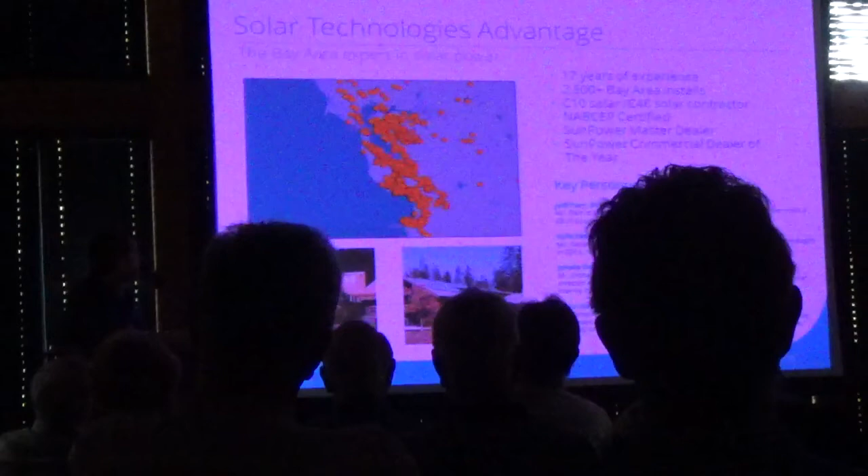We're both a residential and a commercial company, so we have a lot of commercial and residential systems all over the Bay Area. You can't really make them out here, but those dots represent all of our systems, so you can kind of see where a lot of our work is clustered.

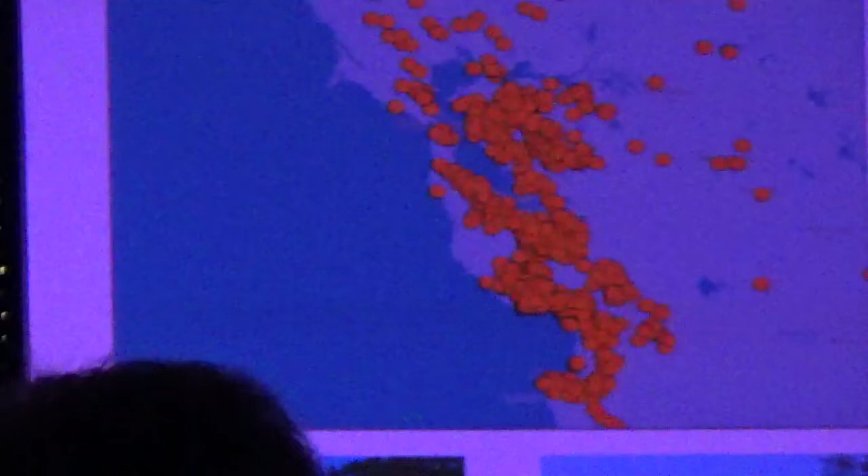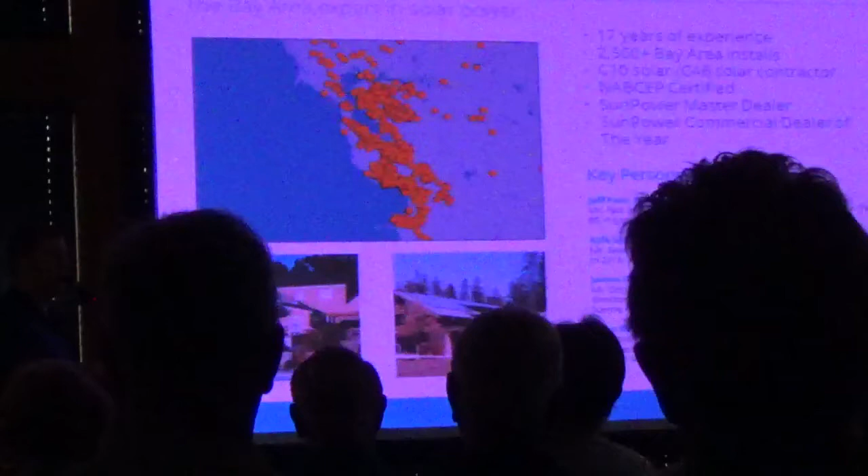I won't bore you with all these things, but any accreditation that you can earn in this business, whether you're NABCEP certified, all these different accreditations, we've achieved all those. And we're a C10 electrical contractor and a C46 solar contractor. So in essence, anything that needs to be done related to a solar project like this, we can do, even if it requires electrical upgrades and things like that on the main service panels and that type of stuff.

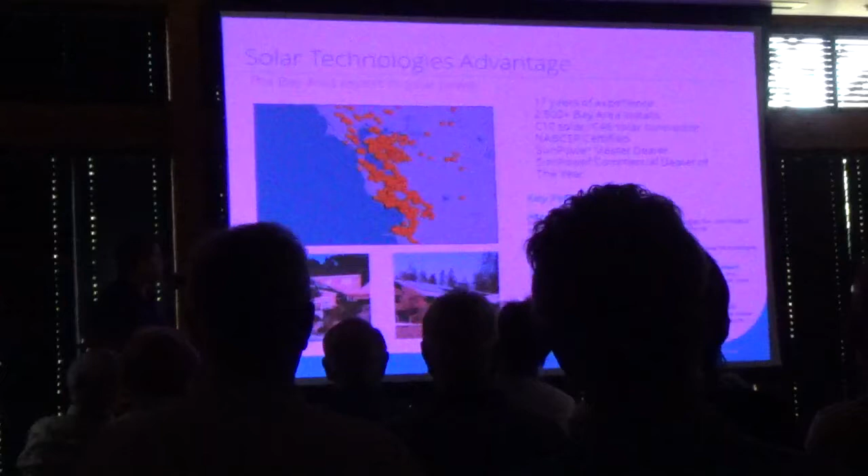The main people you're going to be working with are myself, I'm the president of the company. You're also going to have Kyle Severns, who was part of this process, some of the initial meetings. He runs our residential group. And then on the construction side, once we actually get started, you're going to have James Donaldson and Mike Ross, who are going to be the in-office and on-site directors of commercial activity, and they're going to be the ones running the installation work.

So let's get into how solar works. It's very simple, really, in its installation and operation. Sorry, I'm not too experienced working with the microphone here. It's pretty simple in its installation and operation.

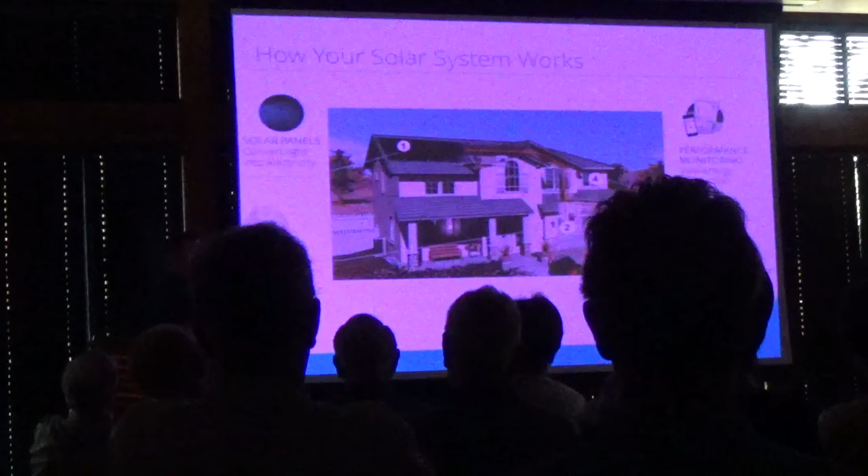You're going to have panels that go up on the roof. Those panels produce DC power, direct current. So what we need to do is invert that power to AC current that the homes can use. Your homes run on AC power, that's what PG&E pumps into your building. So the DC power from the solar panels, when the sun's shining, comes down to an inverter. The inverter inverts that power to AC power, or alternating current. That goes to your main service panel.

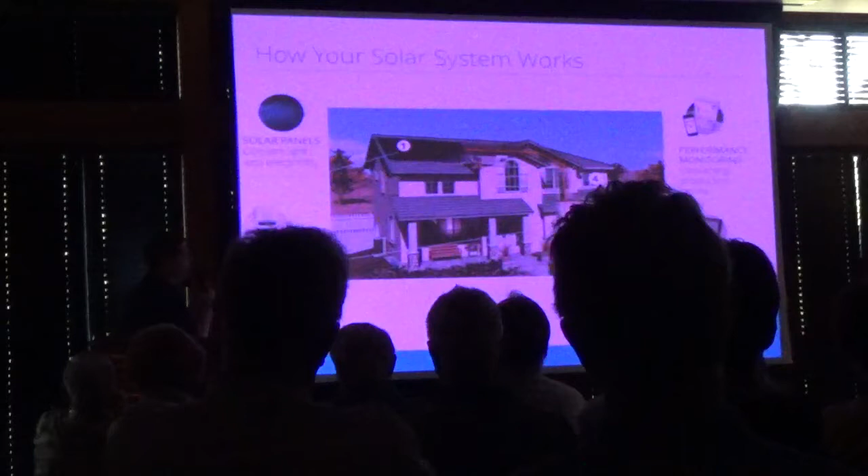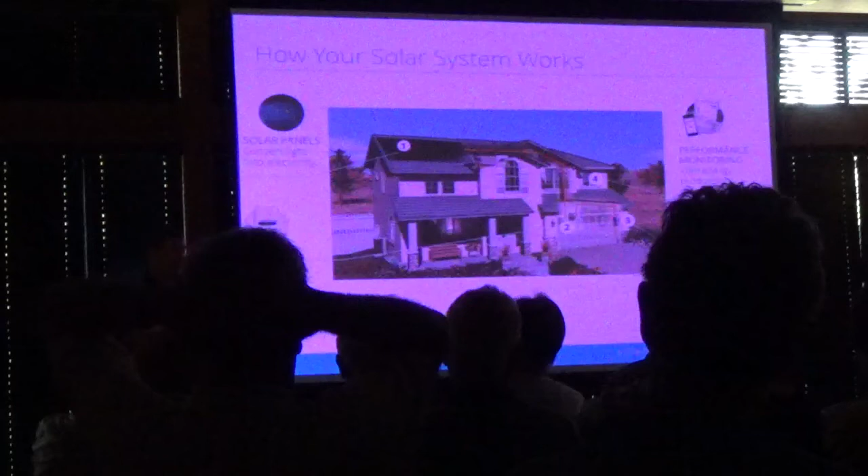During the day when your solar panels are generating electricity, it goes down through the inverter to your main service panel. When you're using electricity during the day, you'll be using that solar power first, so you won't be pulling any more power from PG&E. If you produce more solar than you're using, that extra power gets pushed back into PG&E's grid, and it rolls your meter backwards for credit. And if you have to use more than the solar system is generating, or use power at night, you pull power from PG&E just like you normally do.

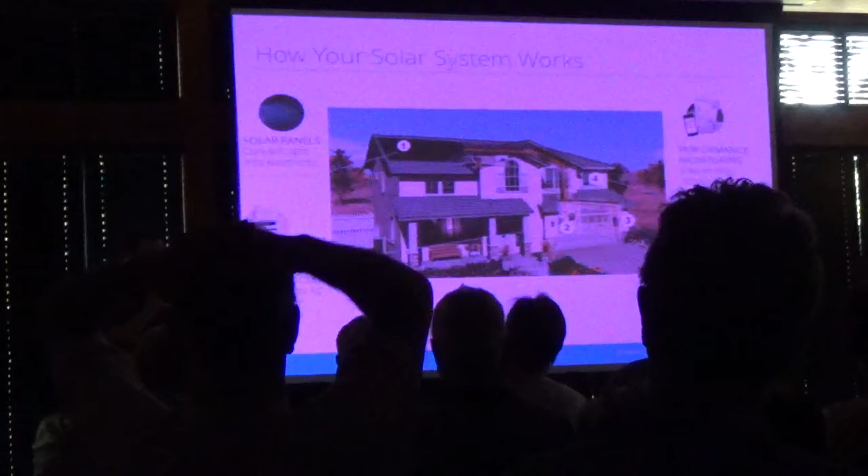So you don't need any batteries, you don't need any extra gear or anything like that. It's really gotten quite simple, where you just have solar panels connected to an inverter, and then it's connected to your main service panel, and that's pretty much it.

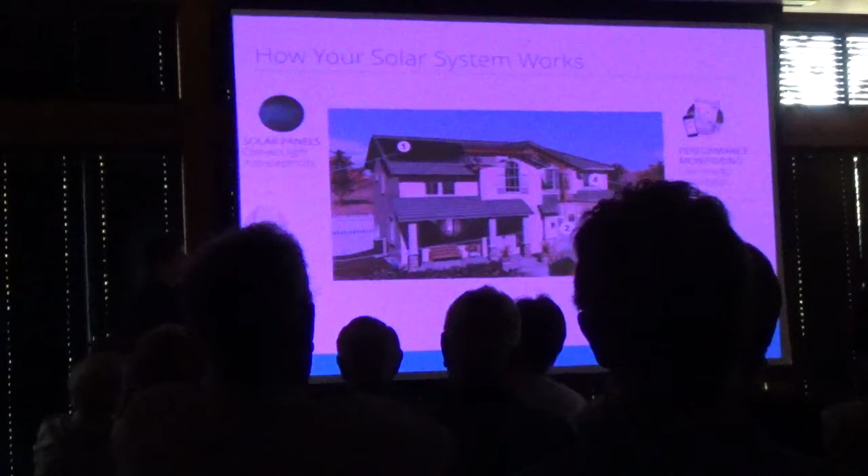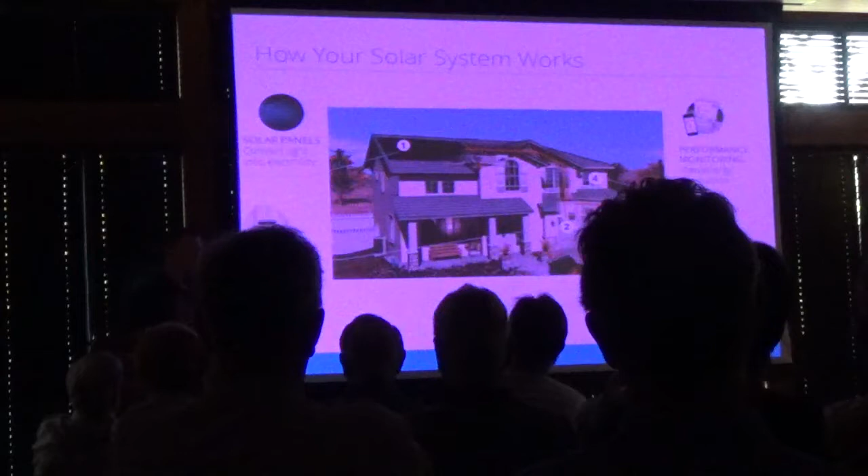Every system also gets an online monitoring system, so they come with apps. You can put it on your phone, your tablet, your computer, and track what the production of your system is in real time, which is kind of cool. A lot of people play with it to start, but really what ends up happening is you just want to make sure your system's running. So we monitor these things at our office as well.

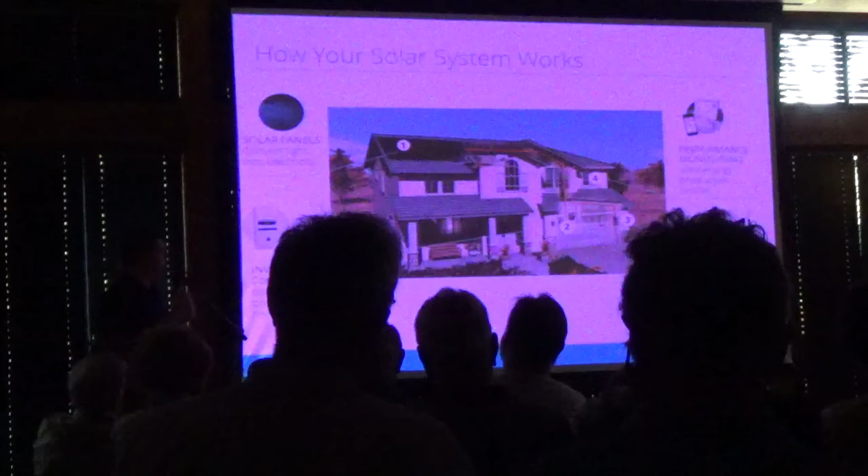But those are really the pieces that go into this. Really it comes down to, are you producing more than you're using? And if so, it gets pushed back into the grid and you get a credit, and that credit pays for your usage at night.

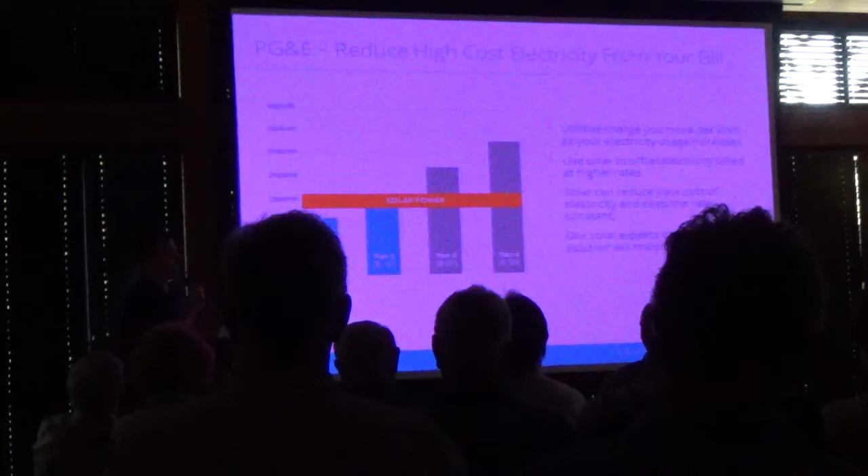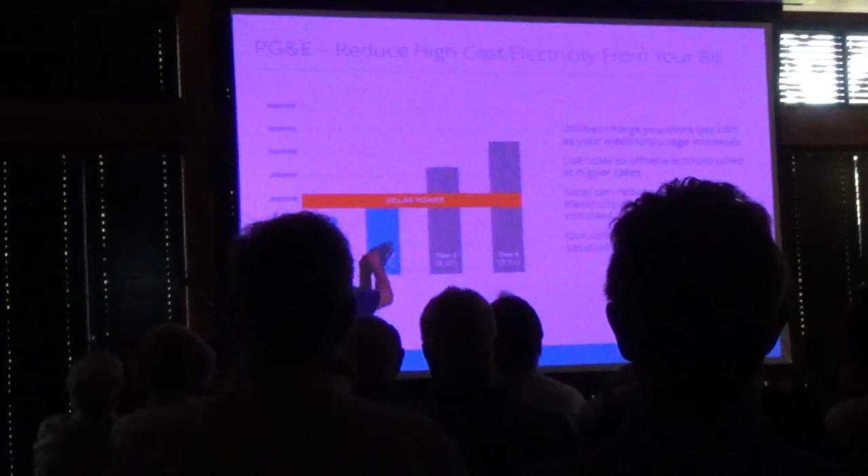So that's how solar works, we just walked through how it goes on the roof. So why do people go solar? The simplest way to sum this up is basically solar is less expensive than what PG&E is charging you for electricity. If you're not familiar with how PG&E charges you, they have a tiered system where as you start to use electricity during the month, you start at 0, and they count the number of kilowatt hours, or units of electricity, that you're using. As you use more, they start charging you more and more for that electricity, so it gets quite expensive.

This doesn't do a great job of depicting it, but if you pay cash for a solar system, the cost is kind of down here. If you finance your system, it's kind of up there. But you can see with the gray bars there at the end, regardless of what you do, solar is less expensive than what PG&E is charging you, which is why everybody's going solar.

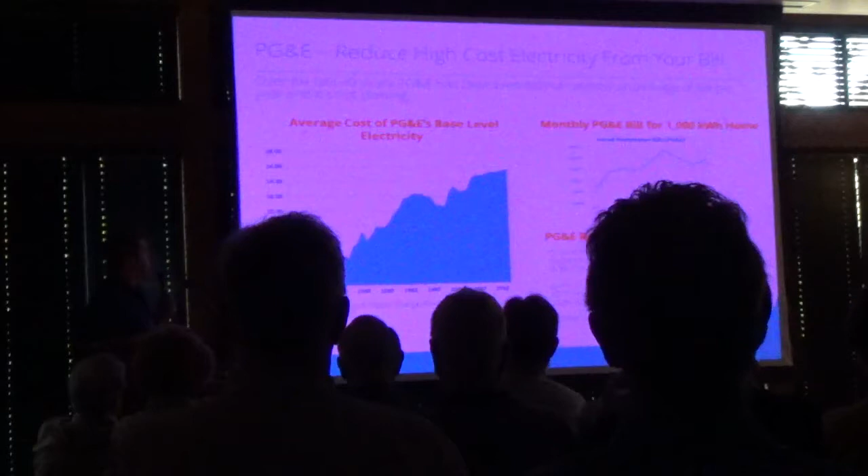It also protects you from rising rates. Once you go solar, you're really no longer dependent on PG&E. One thing that everyone's probably familiar with, given that we're all PG&E customers, is that they've consistently raised rates year after year after year.

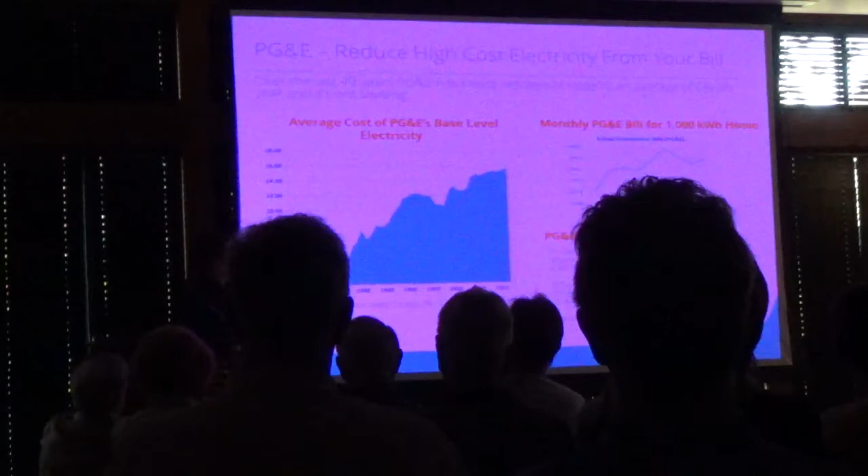This is the bottom two tiers, going back to 1967. This comes from PG&E, so you can see those rate hikes are pretty consistent, up and to the right. Here's a customer who had a $250 a month bill in 2005 - that's basically where they're ending up now. And you can't really make this out, but this is their recent rate case where they got approved a 17, 5, and 6% increase for 2014, 15, and 16.

So one of the benefits immediately is that the electricity is less expensive, so you save money right off the bat. The second benefit is because you no longer have to buy electricity from PG&E, you no longer have to worry about your bills increasing.

I'll get to this if there's going to be a question - the committee asked me to prepare this, but this is basically what is happening to PG&E rates moving forward. If someone has a specific question, I'll turn back to this.

We can also take advantage of what we call time of use rates. The way PG&E works, if you go on a time of use rate schedule, they have these different blocks. At nighttime, they charge you very little for electricity. In the early morning and evening, they charge a little bit more. In the peak part of the day, they charge you a lot.

So if you want to go solar, what we're going to be doing is meeting with you one-on-one. We're going to look at your electrical usage history, and we're going to determine whether putting you on a time of use rate will let us take advantage of this expensive power.

Essentially what we'd do is design a system so that it's overproducing electricity and pushing it back during this part of the day. You earn a lot more financial credit from that, so you can actually save a lot more money that way. That's one of the things we'll be doing with you on an individual basis.

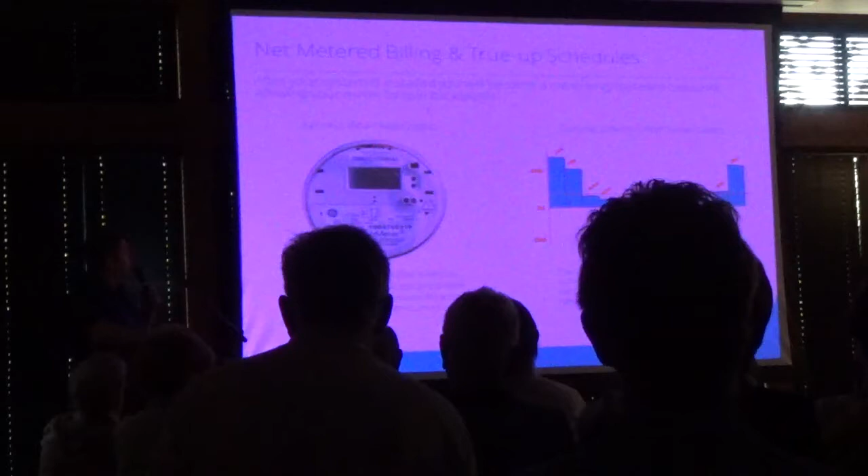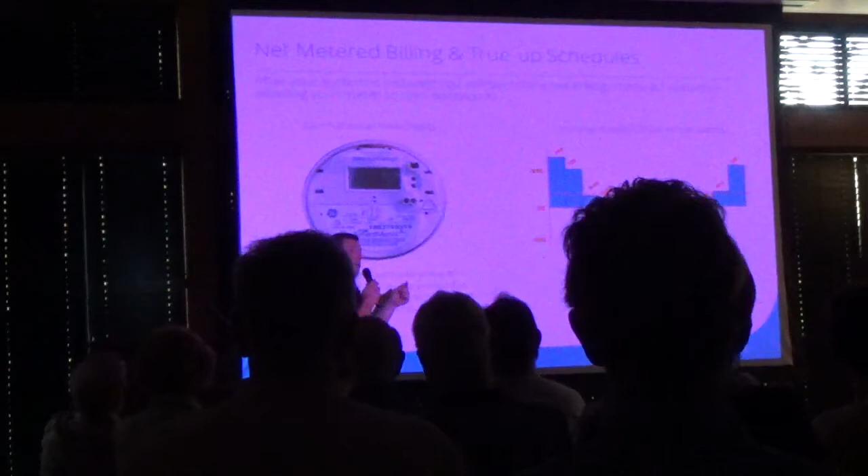Then lastly, once your system's installed and you become a solar customer, one of the nice things is you go on what's called a 12-month true-up schedule. From the day you go solar, you get a bi-directional meter, which counts how much you're using and how much you're producing. Then you go on a 12-month true-up schedule.

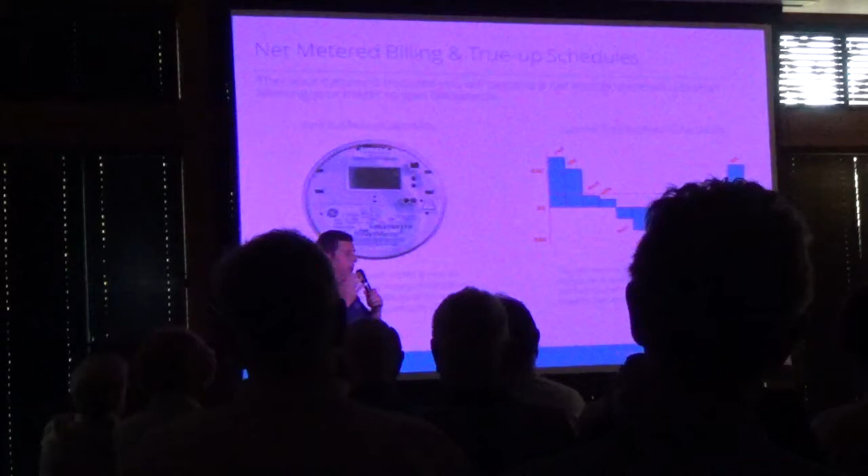So you're only going to have to pay your electric bill once a year. What PG&E does is every month they send you a true-up schedule and say, okay, for the month of January, the sun's not in the sky as long, so you're not producing as much solar - you're probably paying PG&E a little bit during that month. They say you owe us a little bit during this month, and they tally it up month after month.

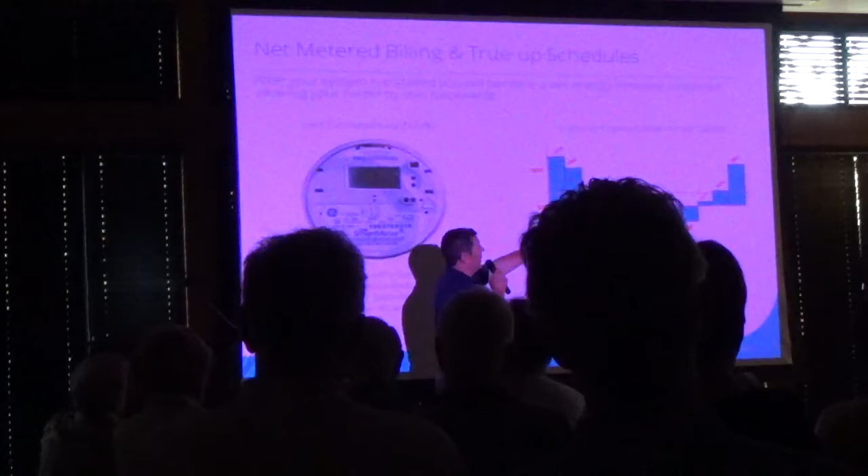In the summer months, you're actually going to produce a pretty significant credit during those months, which will offset the winter months. Then at the end of the year, they just say, okay, as a total for the 12 months, you owe us this much money.

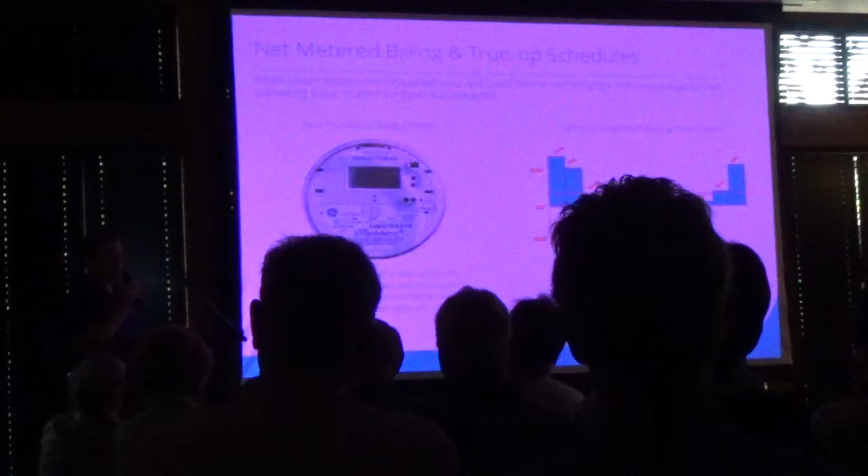In the example we've prepared, that offset eliminates about 90% of the bill for the unit, so you can get an idea of what that would be at the end of those 12 months. But the nice part is you only have to pay once a year.

So the benefits of going solar - as we mentioned, the primary benefit, the reason most people are doing it nowadays, is to save money. We used to have a lot of people go solar strictly for environmental reasons. Now people save so much money with these things, it's really driven by dollars. But this kind of gives you an idea of what we're trying to do.

If this is your pre-solar bill, this is what you're paying PG&E before you go solar. We're trying to eliminate the majority of that and leave you with about 10% of the bill remaining for PG&E. There's really two ways you guys can go about doing that.

One is you can pay cash for the system, so you have an upfront payment, but basically all of this is eliminated. Or the other option is we can look at doing a loan - we can look at financing these systems. And so you don't pay anything out of pocket; you finance the whole system with a solar loan.

What ends up happening is your remaining PG&E bill plus your solar finance payment ends up being less than what you were paying PG&E before you went solar. So there's nothing out of pocket, and on day one you save money, you start saving money. So when we meet with you individually, we'll go through those scenarios with you.

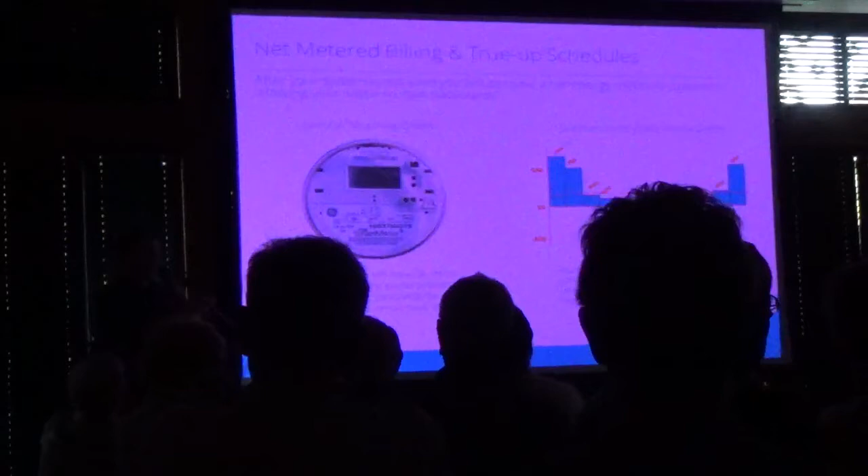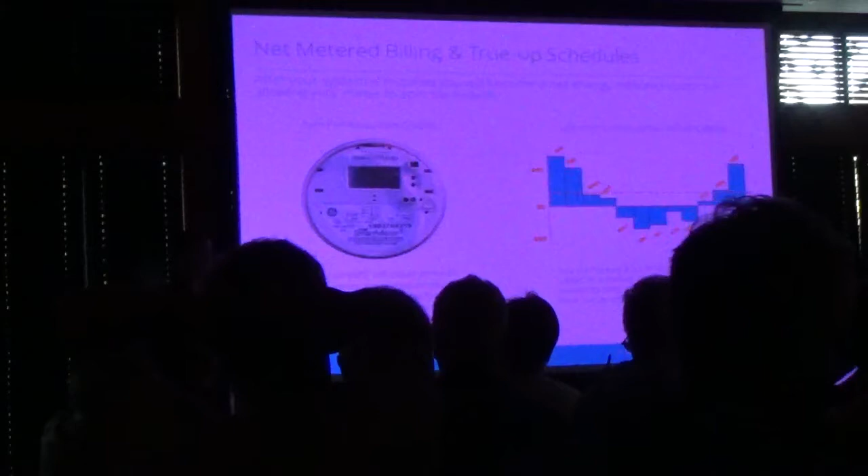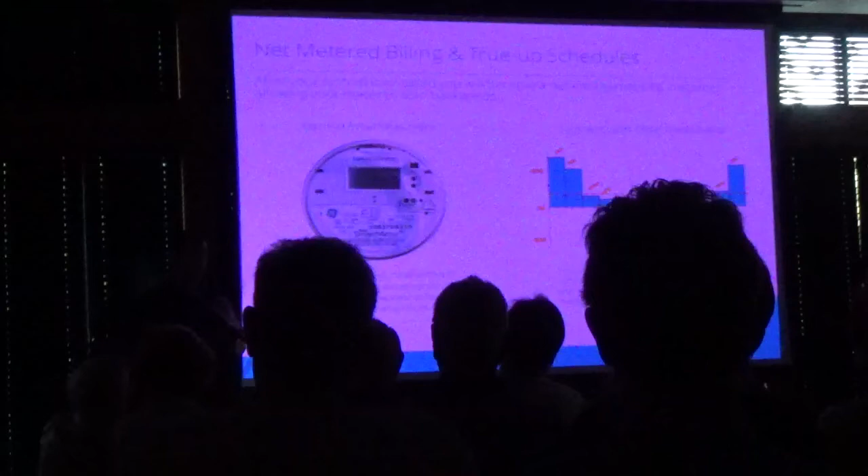Is that annual payment fixed? In other words, if a person preferred to have monthly payments, is that possible, as opposed to a lump sum at some point in the year? Are you referring to the true-up schedule? Yeah. You can, so you have the option of paying monthly if you want. You don't have to. You'll get a bill every month, and you can pay during those months and not pay when it shows a credit. At the end of the 12 months, they're going to net out those 12 months of debits and credits from your solar system, plus what you paid them. So if you want to pay on a monthly basis, you can for sure.

For some people who want to pay cash, those are the people who want to get a return on their investment. You recover your investment really fast, and you have a free electricity bill after that. That's one way to do it, and it's really popular. The other way is a loan. You pay nothing out of pocket, and we can walk you through different loan options in person. The details are better done in person.

The other benefit is you get a 30% tax credit, which everybody loves. So 30% of the gross cost of your system is going to be coming back to you in the year that the system is installed as a 30% tax credit. So not a deduction, it's a dollar for dollar tax credit. If anyone's on AMT, it applies to AMT as well.

Is that just for 2015, 2016? As it stands now, it's through the end of 2016 tax year. Commercial will revert to 10% after the 2016 tax year, but the residential tax credit goes away completely as it stands now at the end of 2016. You would technically have to qualify for the tax credit, meaning you have to have your system placed in service, which is the verbiage the tax code uses, basically meaning your inverter and your panels need to be in place. It doesn't need to be connected to PG&E's grid or operational, but it needs to be placed in service, basically bolted down.

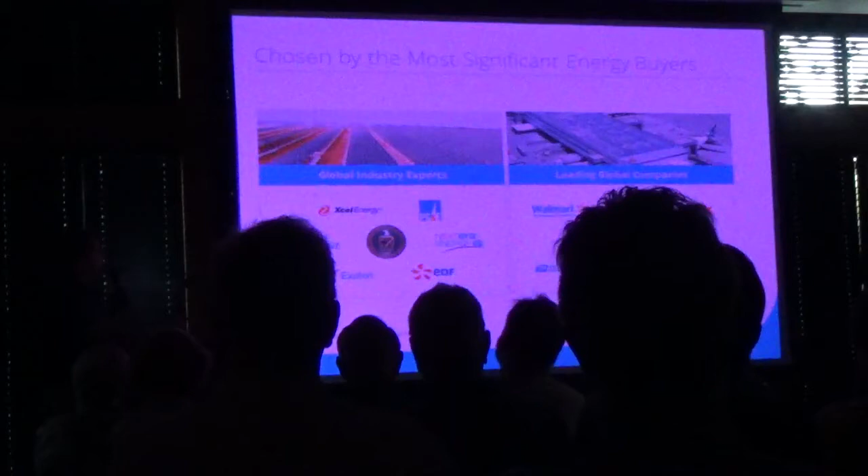Here's an example of some of the customers. They really are kind of a leader in commercial, residential, and utility. They cover all aspects of development.

What makes SunPower such a superior product really goes to the architecture of their panel. I don't want to bore everyone in the room with too much of this stuff, because some people aren't going to be interested in it. But this is a SunPower cell, and these solar cells are made out of silicon.

When the sunlight hits them, it generates electrons that create electricity. The silicon itself is better than their competitors, but the entire back of the cell, if you flip it over, is covered in copper. So you can literally fold this thing like a piece of paper and unfold it, and it still produces almost at max capacity. Everyone else's cells are a thin piece of silicon, with silver paste dripped on the front and two conductors. This thing, if you bend it a few degrees, it shatters like an untempered piece of glass.

Over the years, as the wind hits the modules and they bend, this really drives the majority of the reliability that goes into the architecture of the cells and the panel. The numbers are just staggering when you compare the reliability of the SunPower product to its competitors. We've installed tens of thousands of SunPower panels over 7 years, and we've never replaced a SunPower panel once it's been placed in service. Some have been damaged in shipping, but none have been pulled out of production and replaced.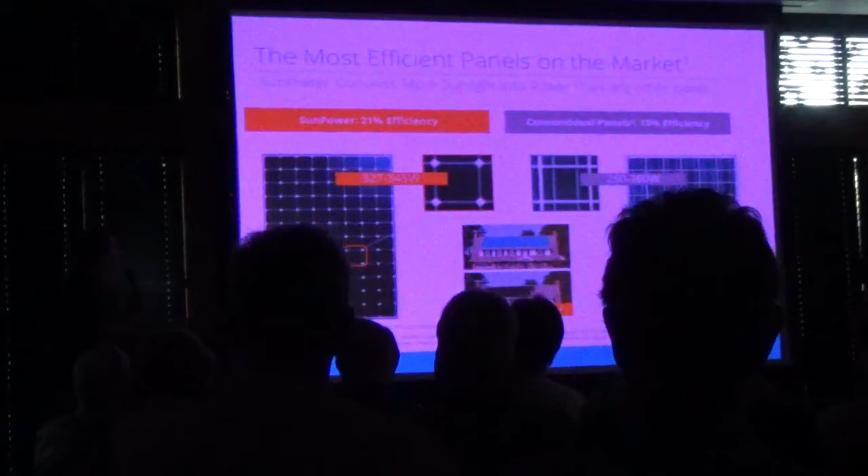The other nice thing about these panels is they're more efficient, so they produce the same amount of power in a much smaller footprint. When you look at your roofs, because you're a vertical building with multiple floors, you have a limited amount of roof space for multiple manors. So we have to figure out how to get the maximum amount of energy out of that roof so we can offset the majority of the bills for all the manors under that common area roof.

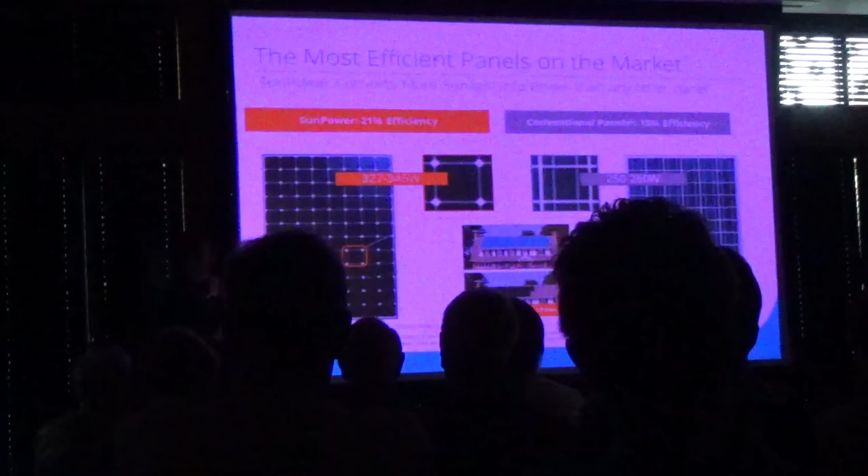SunPower panels are about 21% efficient. You can see everyone else's panels are about 15% efficient. You can tell the difference in the color of these different modules. This one has a much darker look because it has a better anti-reflective coating on the glass, so more light goes through the glass and surface of the cell and is absorbed as energy. Everybody else's panels use cheaper anti-reflective coating, which reflects more light back at you, giving a bright blue hue. The camera is making this look brighter than it actually is, but you get a brighter blue look as opposed to a darker black look with SunPower.

But you can see the difference. This is the same size system, the same productivity system, but you can see how much less square footage the SunPower panels take up to generate the same amount of power. And that's another reason they went with it.

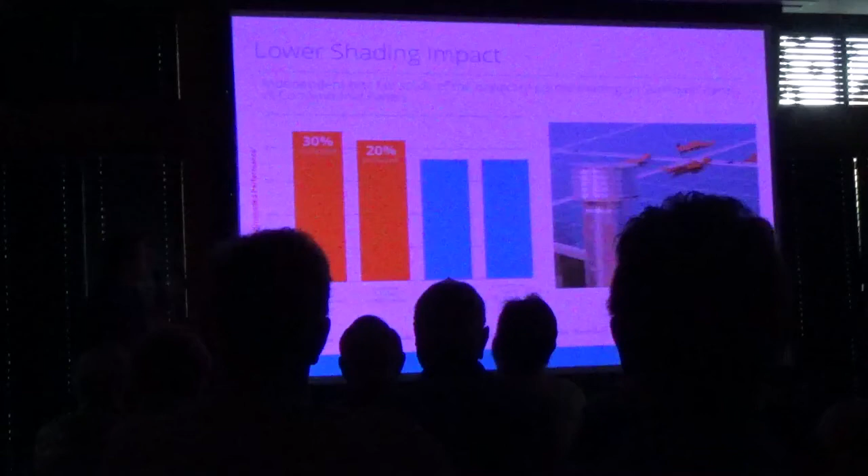And this kind of gets back to the same thing that I was talking about previously.

One of the other best parts about SunPower is they have the best warranty in the business. They have a 25-year warranty, and they guarantee 95% production through the 5th year, then linearly degrade the panel to 87% production by the 25th year. So at the 25th year of operation, they guarantee it's going to generate 87% of its original rated power. If a SunPower panel does end up failing, they pay to remove the panels off the roof, ship it back to SunPower for testing, either fix it and send it back to you or ship you a new product, and they pay to have it put back on the roof. Nobody else in the industry does that. So you get more performance guaranteed, and essentially no cost coverage on the panels if there's ever a problem for 25 years.

What's the warranty on the inverter? Typically 10 years. You can buy extensions to those, but the standard is 10 years.

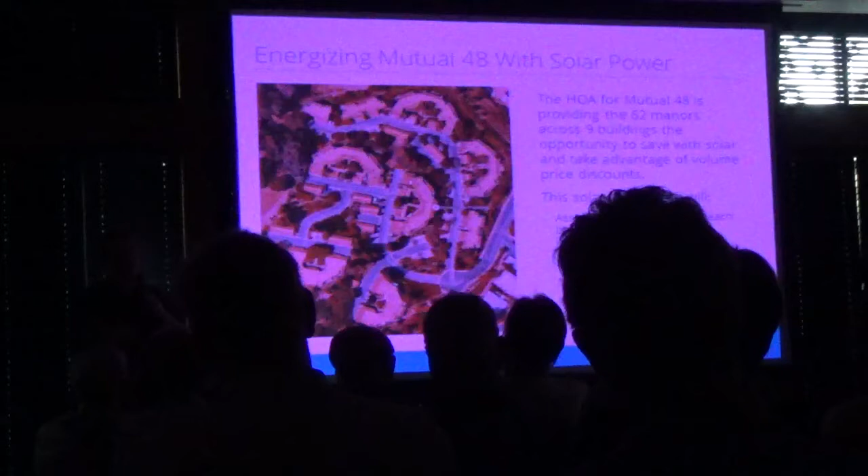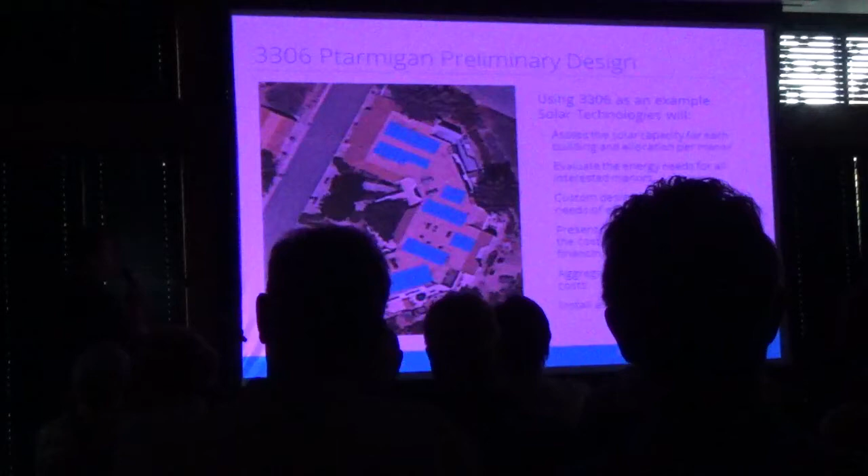So looking at 3306, this is actually a to-scale rendering of what a system might look like. We have a lot of constraints to work with from the building and fire departments. We have to have certain setbacks, and we can't cover skylights or some vents and things like that. So we're going to have to figure out the most efficient way to install modules on these roofs.

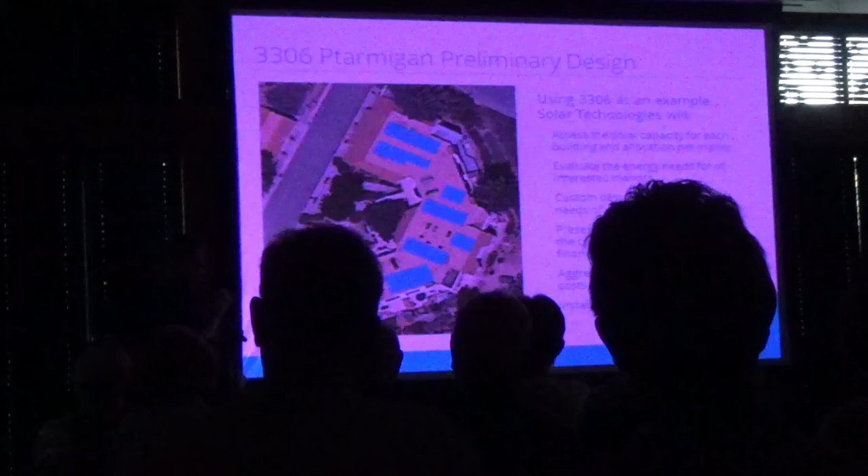For people who want to go solar now, we want to take up as little space as possible so that the majority of the roof is left for others who want to go solar in the future. We're going to go through each building and meet with all the manor owners individually, working through this with all of you.

I'm jumping ahead on slides here, but since we're looking at this, you'll see there's an advantage to going solar now as a group versus individually. The easiest way to describe it is that getting solar panels up and mounted to the roof is pretty consistent, whether it's 2 units, 4 units, or 6 units—that takes about the same amount of time.

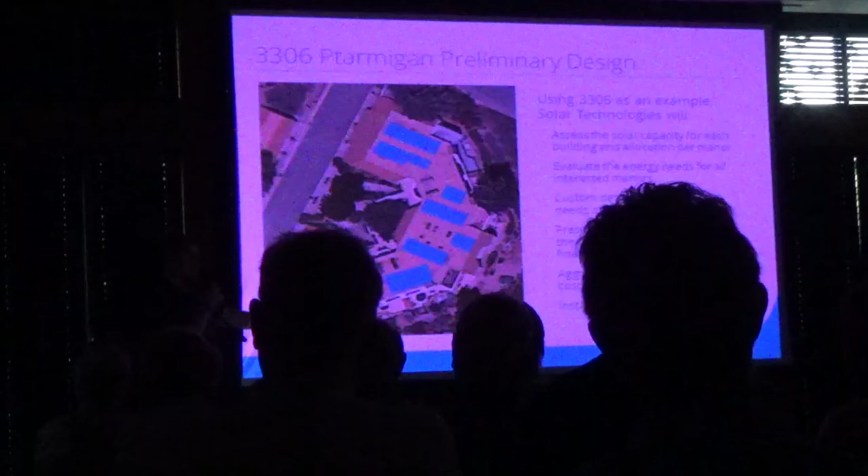What's different is when we come down off the roof and connect to the main service panel. There's a decent amount of work and cost in connecting all the solar panels to the inverters, to your main service panel, and interconnecting them to PG&E. As more people go solar, those costs are spread across everyone in that building, so you get economies of scale shared across the group, as opposed to one unit doing all that work just for one system.

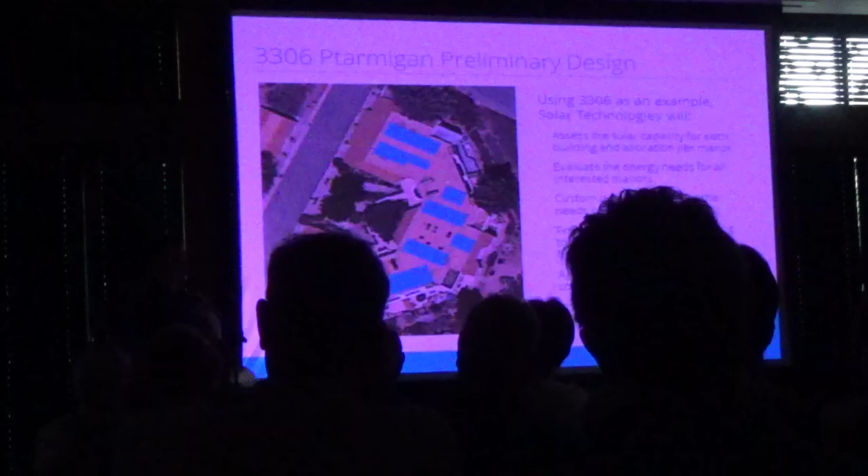Can you put panels on the carports that have no units around them? You can. One of the challenges is how you need to pull wires from those solar panels back to PG&E's main service panel. So if we use 3306 as an example, if there weren't trees or shade and we put solar panels on this side, we'd still have to trench all the way back to the main service panel.

So what we're trying to do is use the cheaper, more cost-effective installation methods first.

There's power to those carports, you know that? Garages, yeah. Well, not garages—I'm talking carports. So we can look at those. I don't want to dive too deep. Maybe there's conduit you could pull back. There might be, I mean, we can look at all that stuff. All we've looked at is 3306 without going down a rabbit hole.

It'll influence how we interconnect your system with PG&E and a bunch of different things. We'll assess all of that when we do the on-site evaluation. But right now, the cheapest way to install solar is on these roofs, coming straight down the side of the building and connecting directly to the main service panel.

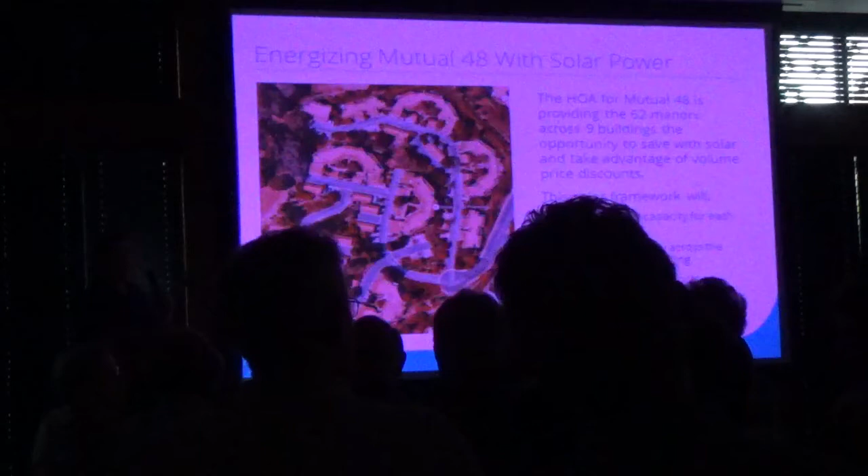So on 3306, which is an 8-unit building, have you determined there's enough space for all 8 to go solar? Yeah. And have you looked at any of the 12-unit buildings? Generally speaking, yes, not specifically.

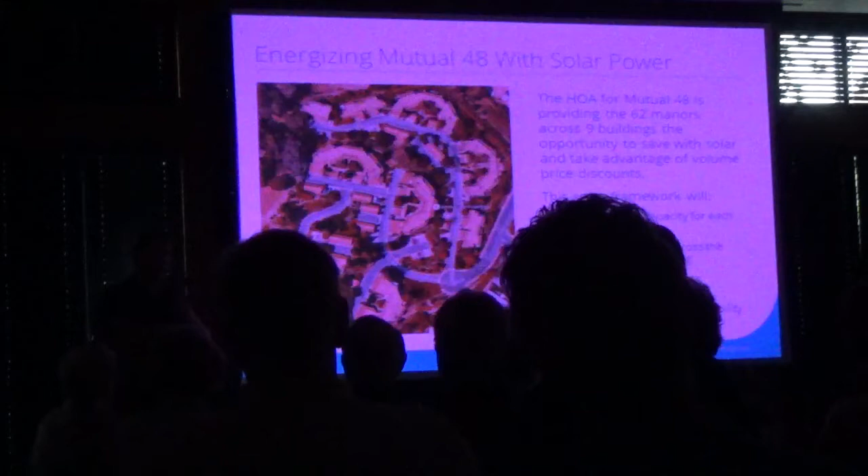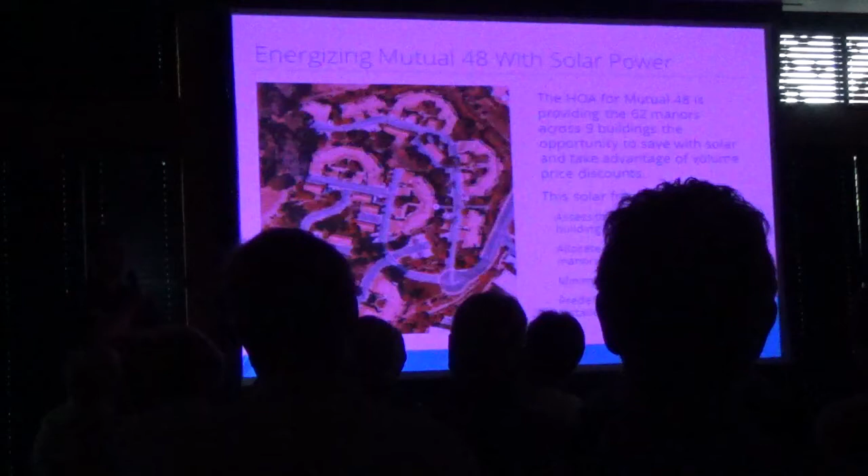For 3306, would there be enough power if every one of the 8 owners wanted an electric car? No, it'll be at capacity at that point. An electric vehicle, if you're using the full battery capacity, is similar to adding another manor—they use about that much electricity. So you're essentially talking about taking this from an 8-manor building to a 16-manor building.

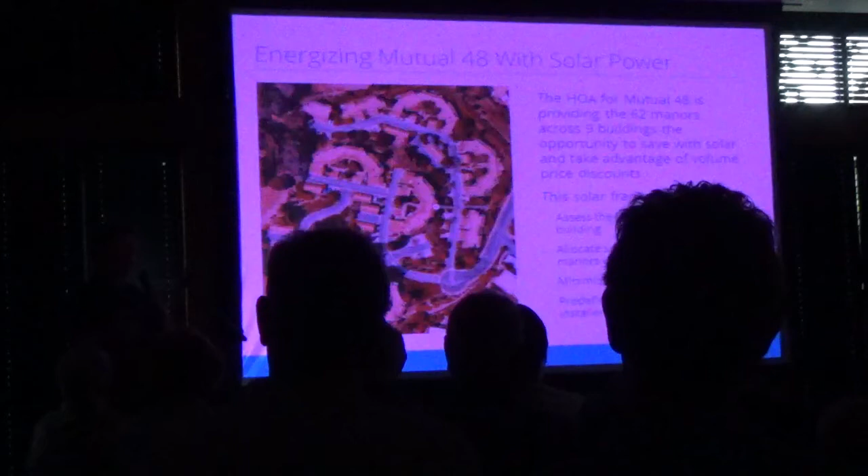You will be able to get more than the manor would need. Looking at the bills for 3306, generally speaking, there'll be more solar capacity than each manor owner needs. So you may not be able to offset the entire EV vehicle, but you'll definitely be able to make a dent in it.

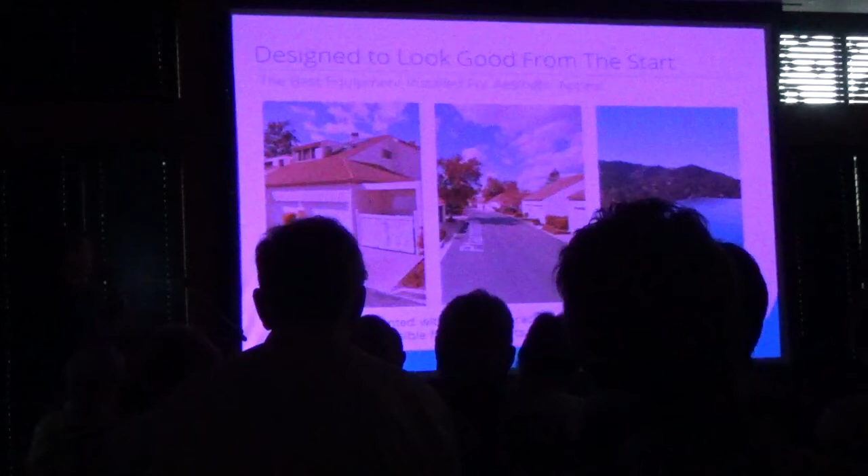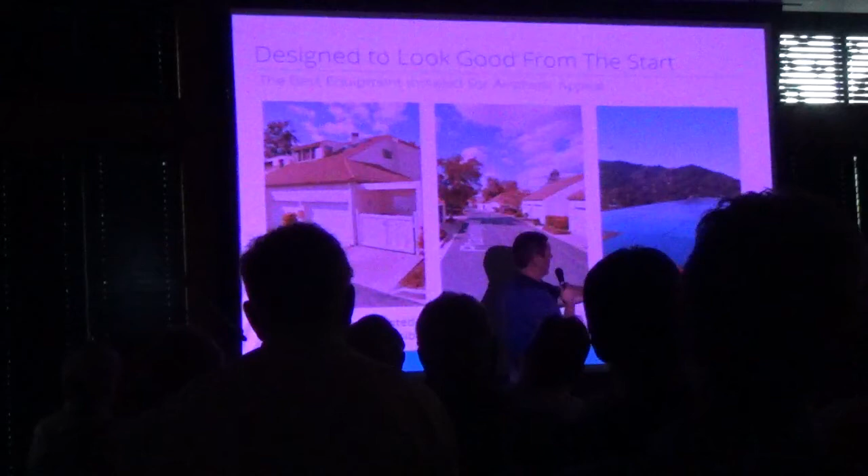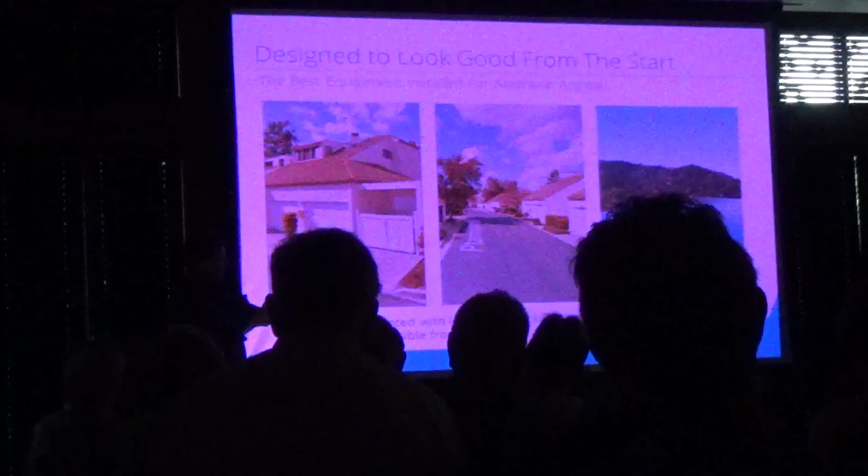This gives you an idea—I pulled street views to show you, since I think one of the things the solar committee and the HOA were concerned about was how to make this look good. This is an actual system we did, up in Marin in the Headlands, but it's the exact same type of roof you guys have—this tan colored TPO or membrane roof. That's essentially what these will look like. They'll be mounted pretty close to the roof, stood off a little bit, but really tight to the roof.